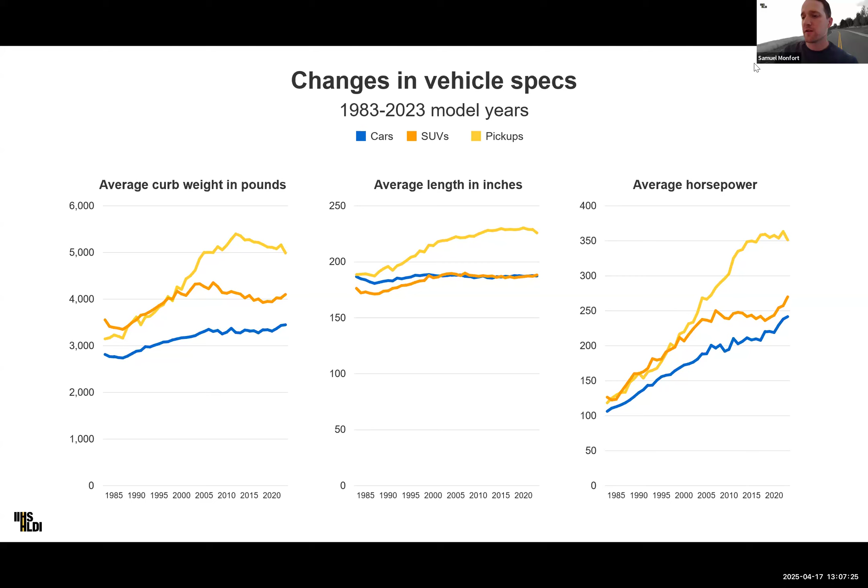But another factor is that not only are SUVs becoming more prominent, pretty much all vehicles are getting heavier, bigger, and more powerful. These three charts represent the average curb weight in pounds of vehicles in the US fleet, average length in inches of those vehicles, and the average horsepower that they have. As you can see, it's increases across the board. This is especially true among pickups, and another factor featured in a lot of media recently is the very large flat fronts of certain pickup models, which is definitely something we've observed quantitatively as well.

There's been a lot of good work studying this, and generally speaking, what they found - just to set up what I'm going to share with you now - is that taller vehicles inflict more damage to the people they strike. This is not terribly surprising, but what they find is that the hip height of the pedestrian relative to the vehicle front end is a key predictor of certain crash kinematics. A crash kinematic is essentially what happens to the person after they're struck - where do they go. It also predicts injury outcomes. We find that these taller vehicles in general tend to imperil people.

Unfortunately, a lot of the research has been done on either older samples of US vehicles or on sets of vehicles from other countries. For example, in Europe, American style pickup trucks are not very common, and vehicles in general tend to be smaller. So our approach here was essentially to repeat some of these findings, expand on this research, and really focus on the current fleet composition of the US today. Because again, our main goal is to understand how the growing US vehicle fleet influences pedestrian injury patterns.

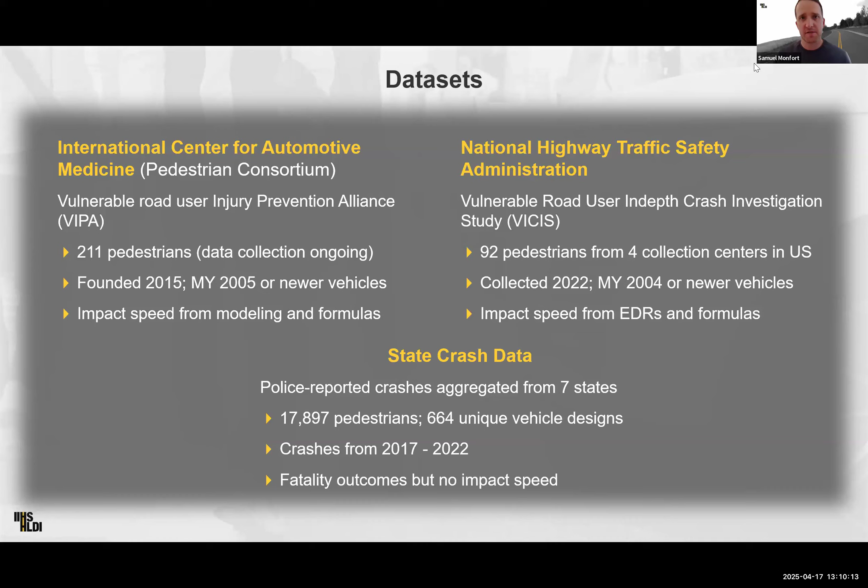The downside of having very detailed crash data is that you can't collect very much of it - as you can see, that's just about 300 crashes. But oftentimes you want to make conclusions using larger data sets, and that's where some of these state crash records come in. So I'm going to be sharing with you next the results of a study we did using this kind of data.

It involved nearly 18,000 pedestrians from police-reported crashes around the United States. These crashes, like I hinted at before, contained less information, so we just focused on fatal or not.

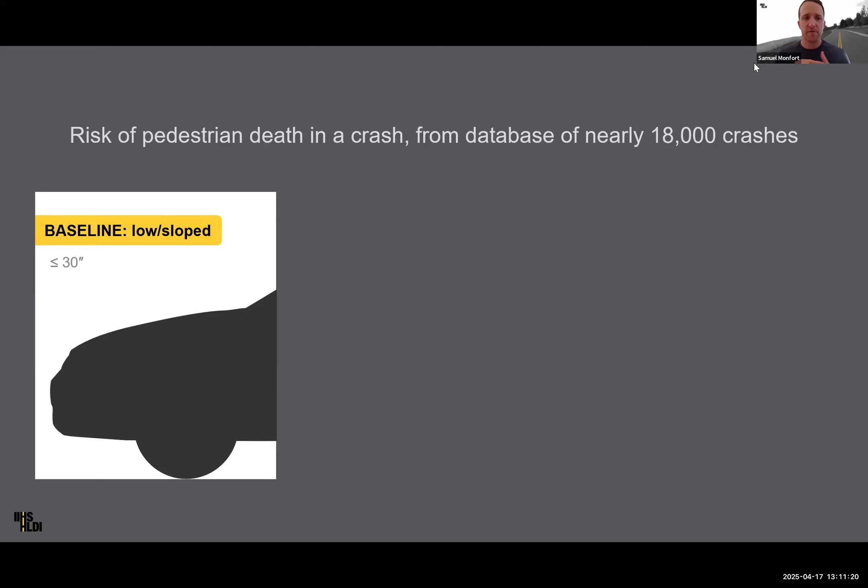Using the state crash data, we wanted to see if certain vehicle front-end shapes are linked with more severe crash outcomes. If we consider a baseline typical passenger car, what does it look like when you compare taller and differently shaped vehicles to it? The facet we settled on was essentially sloped versus blunt. A blunt front end is pretty much flat from the bumper up to the hood leading edge, whereas a sloped design has more curve to it. I'll show you a silhouette to demonstrate shortly.

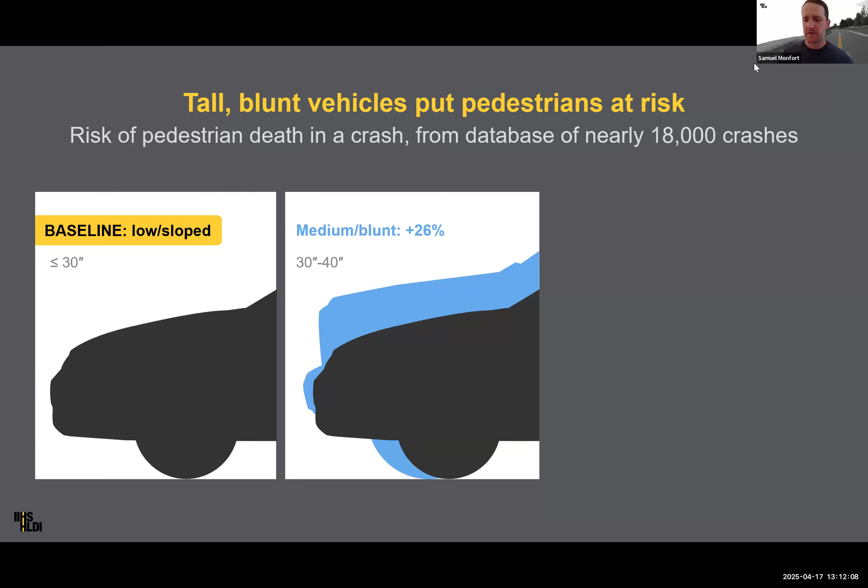Front end shape did matter though. In fact, as you decrease the height a little bit, it was the medium and blunt front ends that elevated crash risk. In other words, if the vehicle is tall, it doesn't matter what shape the front end is. But if the vehicle is intermediate, somewhere between low and high, that's when the front end can start to make a difference. When you compare low-and-sloped against low-and-blunt and medium-and-sloped, you get a similar crash risk all the way down.

This is important because every single pickup in our sample had a so-called problematic front end, either tall or medium and blunt. More than half of SUVs did too. So this seems to be an issue that's mostly evident among SUVs and pickups. Experientially, you can probably testify those tend to be the larger vehicles, but they also tend to be the ones with flatter front ends. On the other hand, none of the cars in our sample qualified as tall, and only a subset qualified as medium and blunt. So again, SUVs and pickups especially tended to be the vehicles responsible for these undesirable crash outcomes.

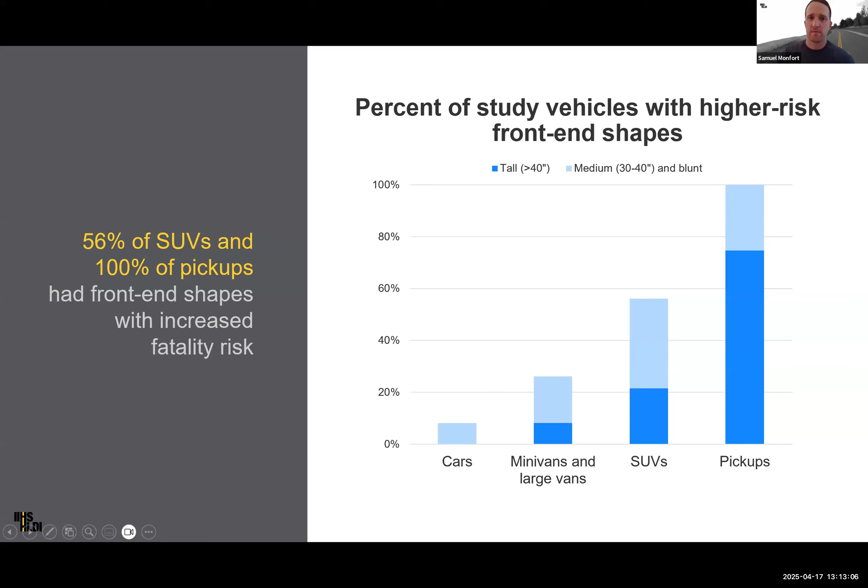What we found is that tall vehicles across the board were associated with greater head injury risk. Regardless of vehicle shape, you had more severe, on average, head injuries for these tall vehicle crashes. On the other hand, tall and blunt vehicles specifically tended to injure the torso and hip more often and more severely - think mid-body injuries. But those head injuries tend to be worse across the board, which may help explain why we saw similar fatality risk for tall vehicles overall.

So what happens after a pedestrian is struck? We're finding that pedestrians struck by tall and blunt vehicles tend to be especially likely to be thrown forward after impact. What does that mean? When you're struck by a vehicle, there are many different outcomes - you can be thrown forward, roll back and then be thrown forward, or roll back and go over the vehicle. So there are many different kinematic outcomes.

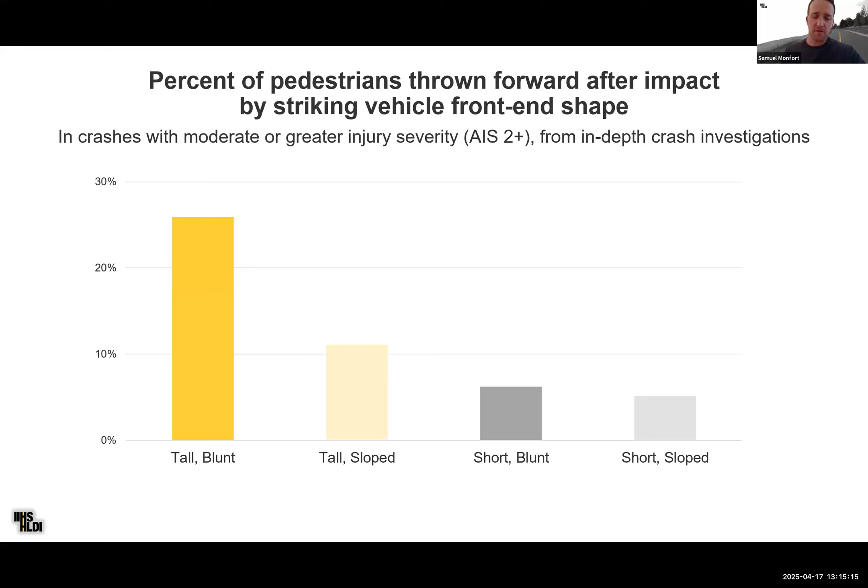What we found is that these tall and blunt vehicles tend to concentrate their crash force all at once, hit you, and throw you forward. This is bad because of that concentration of crash energy - there's less time for the vehicle to impart that kinetic energy onto you, but it's also bad because it puts you onto the road, where you're at greater risk of being subsequently run over. Again, that seems to be unique to these tall and blunt vehicles.

And it's not just crash injuries and kinematic outcomes that are different. It also seems to be affecting the injury risk associated with crash speed as well. One of the most powerful predictors of crash injury outcomes is the impact speed at which you were struck, and what we're finding is consistent with that.

But it's more complicated. The chance that a pedestrian is injured after being struck by a motor vehicle at a certain speed depends on the shape of that vehicle. At very low speeds and at very high speeds, you see similar outcomes between cars, pickup trucks, and larger vehicles in general. But at those mid speeds, you see quite a large divergence.

What we found, for example, is that at 30 miles an hour, the median height car has about half the serious injury risk associated with it than the median height pickup does. And this is concerning again because of the rise of these vehicle types on the road today.

I'm going to hand it off now to Becky, who's going to present other work that we've done on vehicle front end height. All right, thank you.

So for this analysis, we once again looked at that in-depth data where we really have detailed information about the crash, the injuries, all of that. But we're going to flip it on its head. So instead of looking at vehicles by category in terms of height, we're actually going to be looking at the pedestrians, because pedestrians can vary greatly in height. So we want to look at the pedestrian hip and waist height relative to the front end height of that vehicle.

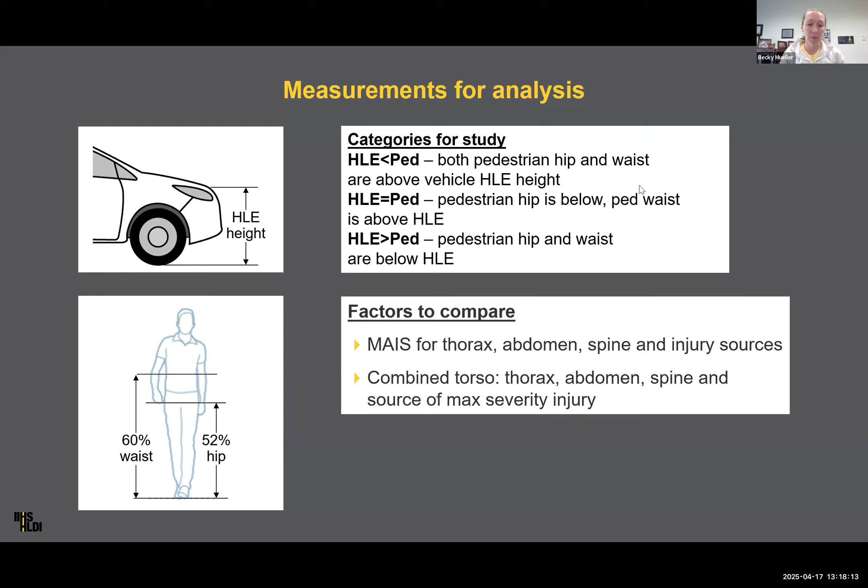We looked at the torso overall, and then we also looked at the individual body regions that comprise that torso area: the thorax, the abdomen, and the spine.

We found that between the ones where the person is much taller than the car height, and the ones where the vehicle height is much taller than the person's hip and torso, we found a significant difference. As the vehicle gets taller relative to the pedestrian, the probability of getting an AIS2 plus injury to any one of those body regions increases. And it's especially true between those very short vehicles and the very tall vehicles.

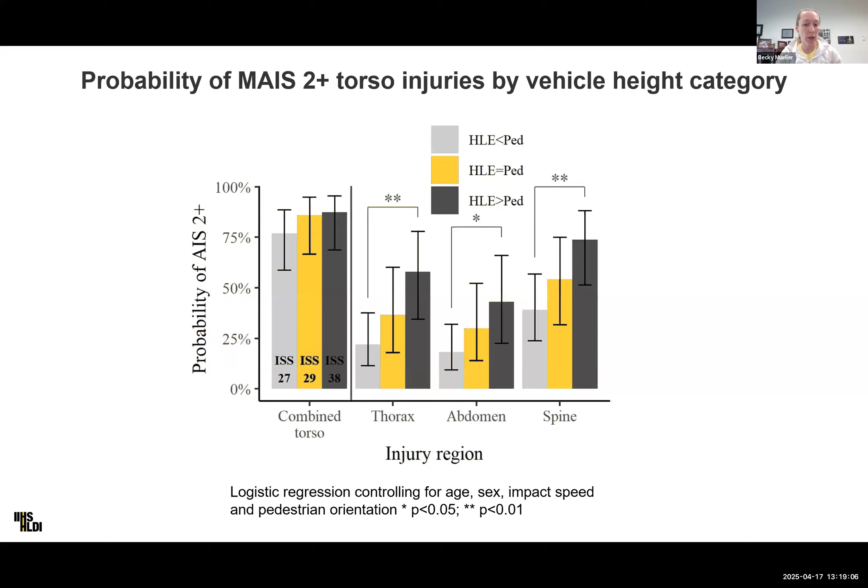The thing that we really wanted to drill down to is where are these injuries coming from. The big difference between those shorter vehicles and the taller vehicles is really the prevalence of injuries coming from that front end of the vehicle.

So these very tall pickup-like, large SUV-like vehicles, we're seeing a large proportion, a little over 30%, of the torso injuries coming from components like the headlight, the grille, and those front fascia components, versus a lot more of those injuries coming from the hood and the cowl area for the shorter vehicles, either medium height or very short. And what does this mean in terms of how we can influence vehicle design is the real question.

We'll talk a little bit about that. What we're seeing is there's different kinematics associated with this as well. So when the pedestrian hip is much higher than the hood leading edge, the pedestrian's more likely to roll up the vehicle and also translate up the front of the vehicle, where we might see heads hitting windshields and A-pillars and those kinds of things, as well as a somewhat indirect hit to the torso.

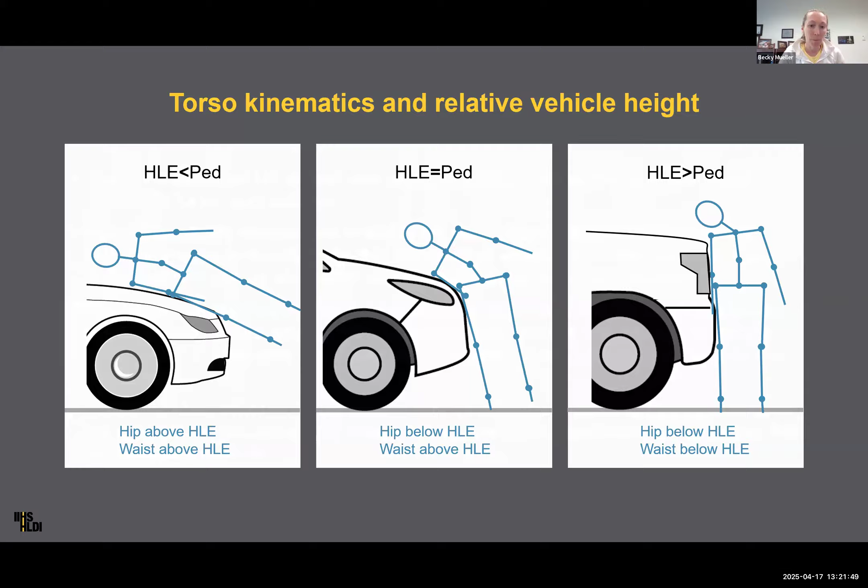We are really trying to understand what kind of tests either we or NHTSA or other organizations can apply to these vehicles to address those very different kinematics we're seeing, very different injury patterns and injury sources, and focus on whether there's something that can be done from an impactor test standpoint. We know that organizations like Euro NCAP have head impacts and leg impacts, but this torso region is something that has not yet been addressed.

There are folks working on developing an impactor test for the thorax, but we want to make sure that this impactor test works not just for vehicles in Europe, but is also applicable to all the types of vehicles, especially those American-style pickups that we have here in the US that may be unique, and there may be limited data on understanding that.

What we do know is that the tallest of these vehicle categories, these large SUVs and pickups, are associated with the largest proportion of those AIS 2+ torso injuries, and often result from those front components, the headlights, the grille, the front fascia, compared to medium and short vehicles where injuries are coming from the hood and the greenhouse.

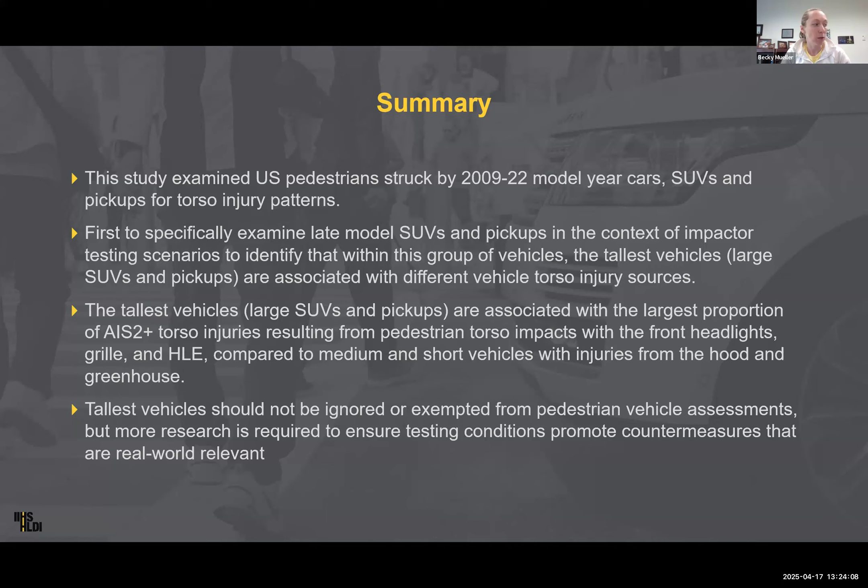So there's no one-size-fits-all method for assessing these vehicles. These may be very different methods of assessing a small, short vehicle versus a tall and blunt vehicle for these kinds of injuries.

We've got an ongoing research project with the University of Michigan, UMTRI, to look at the effect of these different front end shapes and sizes and stiffnesses on the prevalence of these torso injuries. We're looking primarily at these very tall, boxy front end vehicles, and we want to learn more about how vehicle design, mainly changing subtle aspects of the shape and size of those vehicles, can influence the prevalence of those torso injuries.

So we're working with them. They have experience using these kinds of human body models, finite element models. They've worked on developing a series of different front end shapes that represent the wide range of vehicles that exist here in the US.

They're going to be running a parametric study of about 300 different simulations, looking at a range of those impact speeds, in those speeds where, as Sam had mentioned, there's a big difference between whether the vehicle is short or tall, and the injury outcomes.

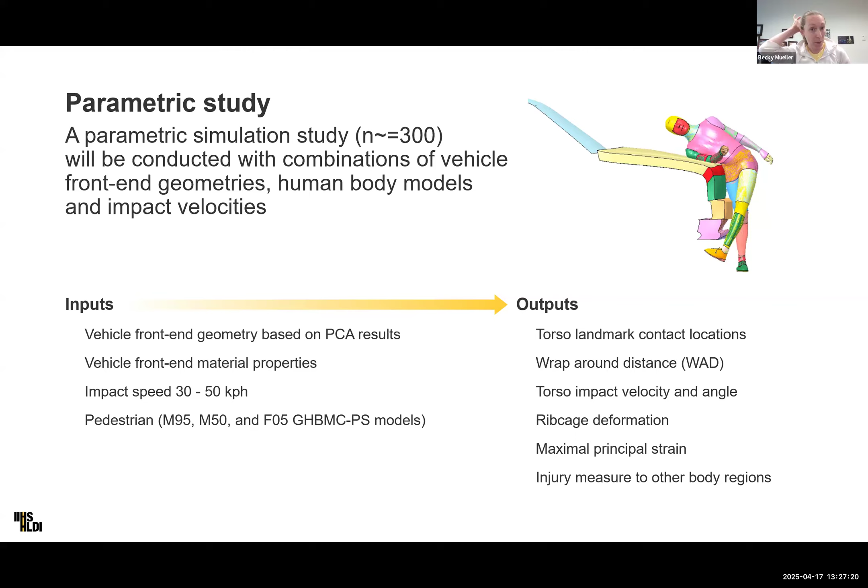So that is basically the summary of what we're planning to do here. We want to understand those torso injury sources for a category of vehicles, across vehicle categories, and what are the potential types of effective tall vehicle countermeasures for the torso.

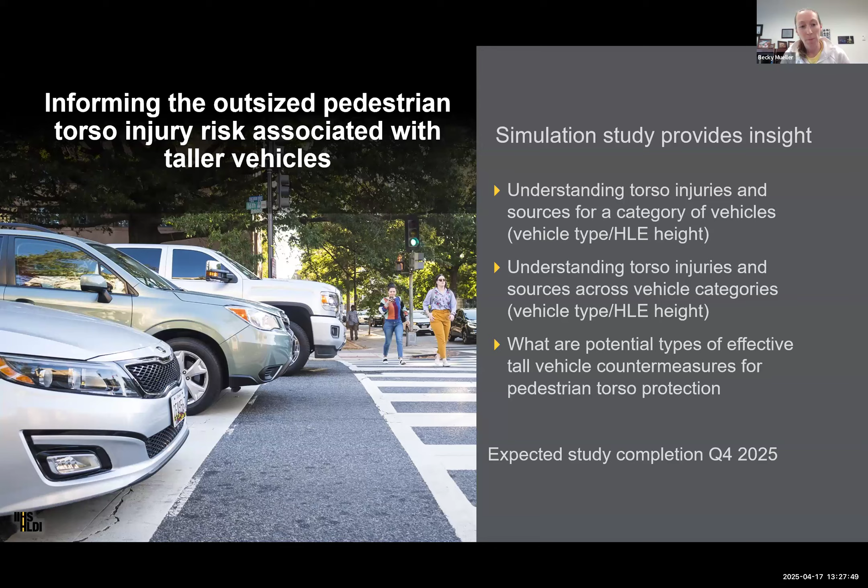Something else we're looking at, a different aspect of pedestrian safety, is blind zones, from the driver's perspective. How many of these pedestrian crashes occur because a pedestrian is caught in a driver's blind zone? We've developed a method for measuring driver direct vision so we can compare different vehicle models, and we've got two different driver eye perspectives: a 50th percentile male sitting in our mid-track average position, and a small female sitting further up in the vehicle. How do different drivers see for a given vehicle, and how does a given driver see across a variety of vehicles? This is very new research we're doing.

We're also hoping later this year to have a study comparing real-world crashes to the blind zones in those vehicle models, to see if larger blind zones correlate with a greater chance of hitting pedestrians. So stay tuned for those results, as well as studies where we look at a wide range of vehicles and compare across the US fleet, from a mini car all the way up to a large pickup, to see what blind zones are occurring and what we might do to reduce that—whether changing vehicle structures, or promoting technology that alerts the driver to a pedestrian in a blind zone.

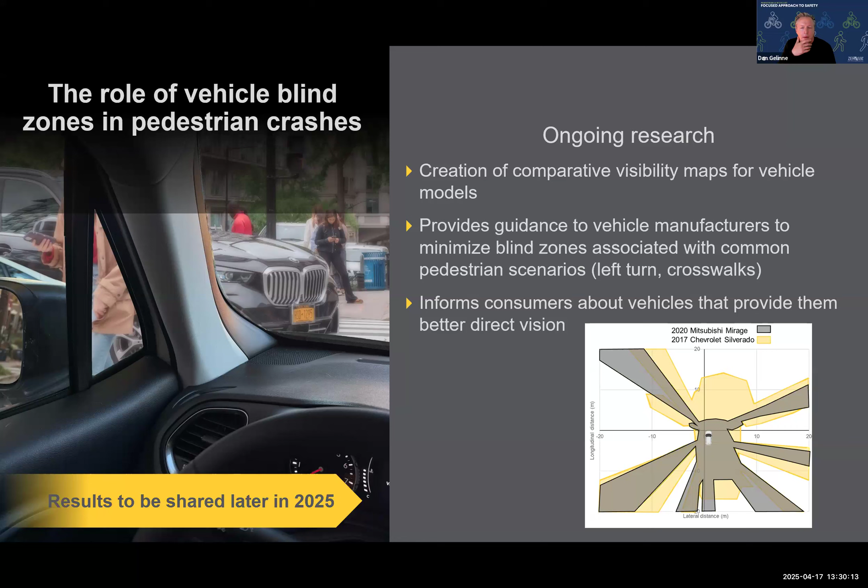Before we move along, there was a clarifying question about the acronym HLE used throughout the presentation—could you redefine what that is? That is the hood leading edge, the height of the front portion where it transitions from the hood going up to the hood going back. Excellent, thank you so much, I appreciate it. We'll get into more questions a little bit later, but thank you for that presentation.

Thanks for having me today to talk a bit about the work AAA has done, and my team has managed, regarding pedestrian detection systems. If you're not familiar with AAA, we're the world's largest motor club. We've been advocating for safe automotive systems since 1902, formed as an advocacy organization back when we were arguing for equal rights of the newfangled automobile alongside horse and buggy, and we're still doing that today. I run a team of engineers on both coasts focused on advanced vehicle technologies—everything from advanced driver assistance systems, in this context, all the way to different fuels and electrification, and everything in between.

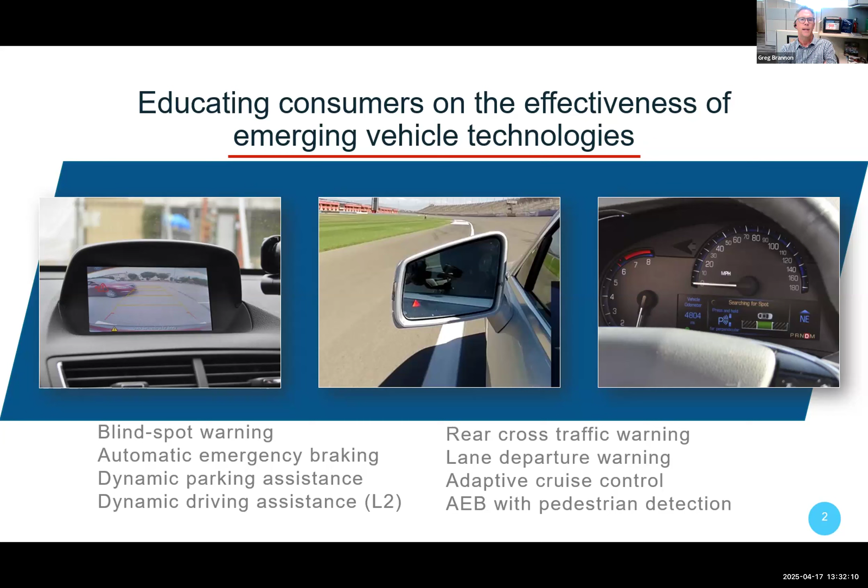Since 2013 we've been analyzing different advanced driver assistance systems, and related to the presentation Becky and Sam just provided, pedestrian detection systems are something we really felt it was important to look at. This study is a few years old now and we're in the process of refreshing it. But it would be great, regardless of hood height or vehicle design, if the vehicle didn't hit the pedestrian to begin with. That's really the point of a pedestrian detection system, or pedestrian AEB—automatic emergency braking—for this scenario. We wanted to look not only at the basic functioning of these systems, but also the more challenging situations where a pedestrian was most likely to be struck or killed.

Some of those scenarios outside of broad daylight in an intersection include things like a child pedestrian coming out from between parked cars, a pedestrian right after a curve, as well as two pedestrians just along the roadway walking alongside the road.

But most importantly, we also wanted to look at the performance of pedestrian automatic emergency braking at night. The data shows that approximately 75% of pedestrian deaths happen at night, and I think you'll see from the results that if you were designing a system to do the most good, you might end up in a different place than we're currently at.

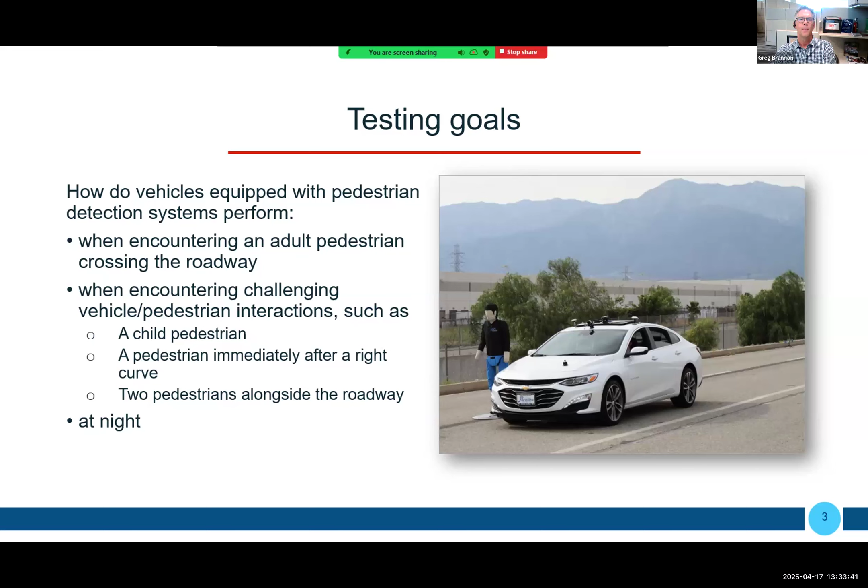First, we'll look at the most basic scenario, one that is pretty similar to what the European standards at the time had in place, and now also looking at some of the things that the proposed FMVSS 127 standard offers.

This is the daytime scenario where the pedestrian crosses in front of the vehicle, and the vehicle, if no braking is applied, would strike the pedestrian at the center of the vehicle.

We tested at a couple of different speeds because we felt like the lower speeds, while interesting, didn't offer the situations where most pedestrians were injured. So we tested at 20 miles an hour and at 30 miles an hour.

At 20 miles an hour, we had 100% of the vehicles we tested have a notification that there was a pedestrian in the roadway. Unfortunately, they only avoided a collision with that pedestrian some 40% of the time.

And at 30 miles an hour, the effectiveness of the systems really went south, with only one test vehicle avoiding the collision at all, and in that case, only 2 out of 5 runs.

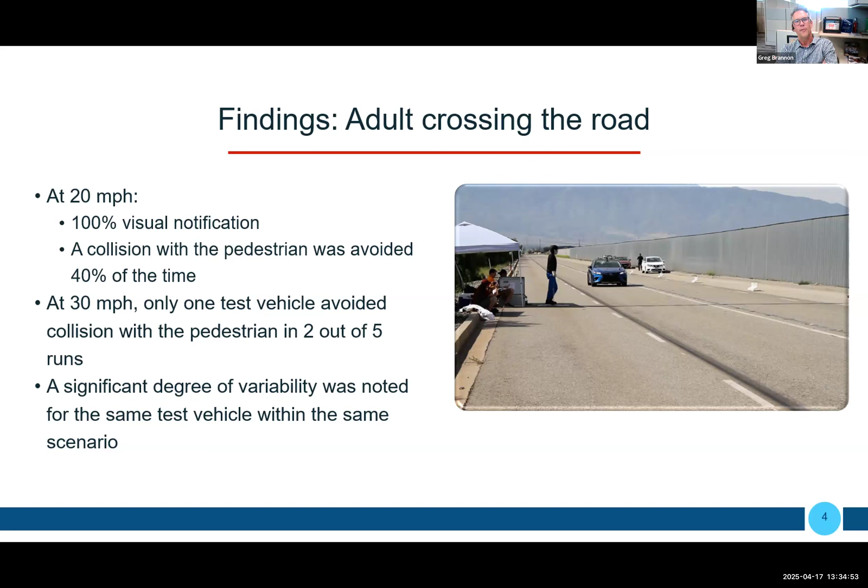So as you'll see in the video here, I'll go ahead and roll. There's a significant amount of variability in the way these systems work.

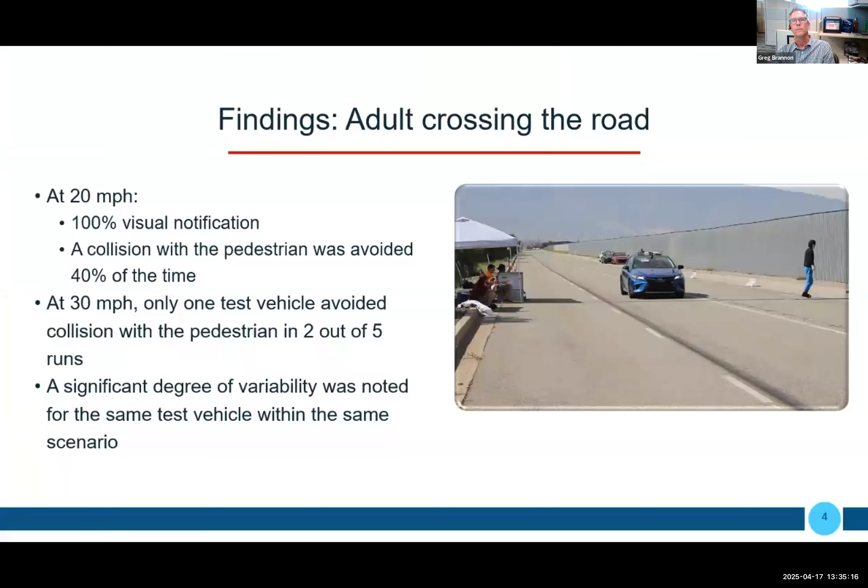Right, so we'll move on to the next scenario here. That is the one with the child darting out into traffic, and we say darting because it's moving at a little quicker pace than the adult pedestrian in the scenario we just saw.

We looked at this at both 20 and 30 miles an hour, and unfortunately, in the case of the child pedestrian, a collision occurred almost 90% of the time. At 30 miles an hour, none of the test vehicles avoided the collision with the child.

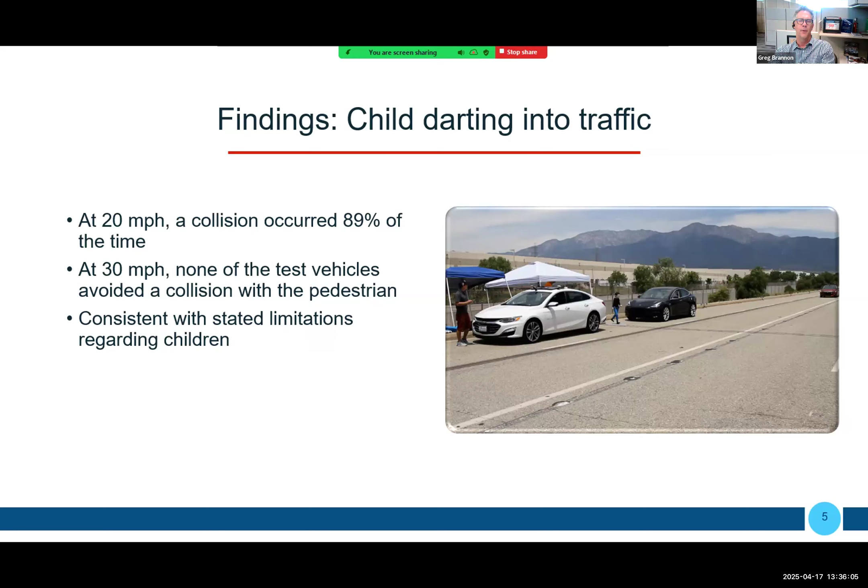As noted, we weren't terribly surprised by these findings, as most of the owner's manuals show these types of limitations. Unfortunately, the owner's manuals don't always track with the advertisement for the vehicle. So let's look at the scenario.

Unfortunately, stopping after the pedestrian is struck is, in this case, not terribly helpful.

Moving on to the next scenario we looked at here. Again, 20 and 30 miles an hour, and this is basically two adults walking down the road, with one adult slightly in the path of the vehicle.

We tested at both 20 and 30 again, and we found that unfortunately, a collision occurred 80% of the time at 20 miles per hour, and at 30, only one vehicle avoided the collision on one run.

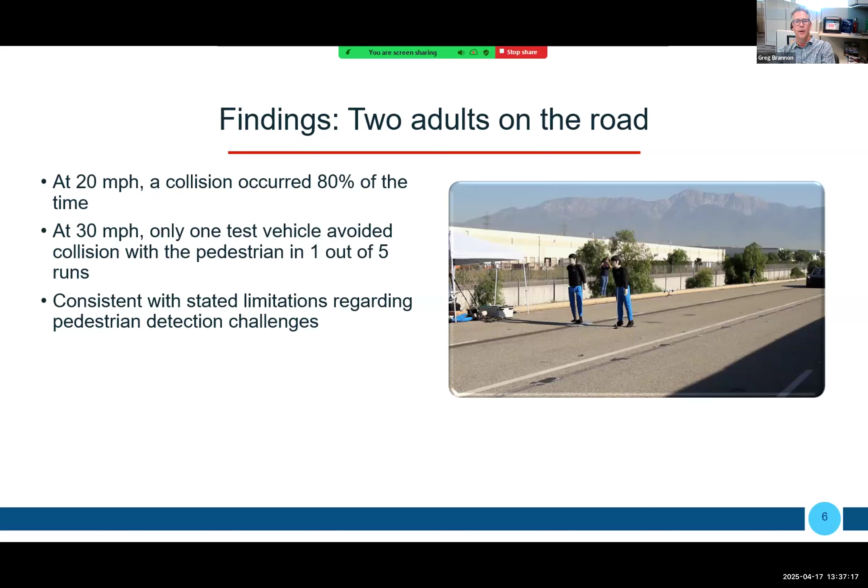Again, consistent with the expectations of the system, but this is a very basic scenario where a pedestrian is simply walking down the road. So let's watch the video here.

All right, so getting into some very interesting findings. In the essence of time, I've left out the research that we did around a curve. The short version is they were completely ineffective around a curve.

I think you'll see with the nighttime effectiveness of the system that there is a tremendous amount of work to do, whenever you consider that 3/4 of pedestrian deaths happen at night, and the systems were all completely ineffective. So we'll watch some of the videos here on that.

So that, unfortunately, is not a good result.

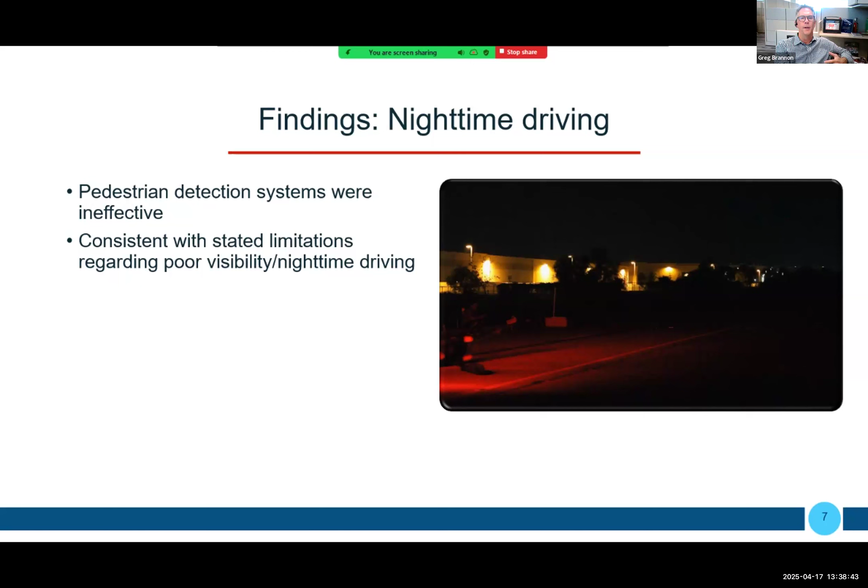As I mentioned earlier, we're going to be revisiting the nighttime portion of this testing in a couple of weeks, and we're very anxious to see if the vehicles have gotten better over the past few years at detecting pedestrians at night. We're also going to look at the implications of a roadside worker wearing the clothing they should be wearing along the roadside, and see if the systems work in that scenario.

So our recommendations here are fairly straightforward, focused on drivers and regulators: for drivers, you need to drive these things like they are not there.

And if you're in the situation where pedestrian detection and automatic emergency braking may help, that's great, but you definitely should not rely on it, and discourage yourself from engaging in things like looking at your phone, because 100% we cannot rely on these systems to avoid a collision with a pedestrian.

For the auto manufacturers and the regulators, our message was that if you're going to focus on one thing, make these systems work at night when pedestrians are actually dying. The good news is the regulators heard that. The bad news is the automakers are sort of fighting that new regulation at the current time. So TBD on what the outcome of all that's going to be, but we're hopeful that the persistence on the message that if we want to do the most good, these systems definitely need to work at night.

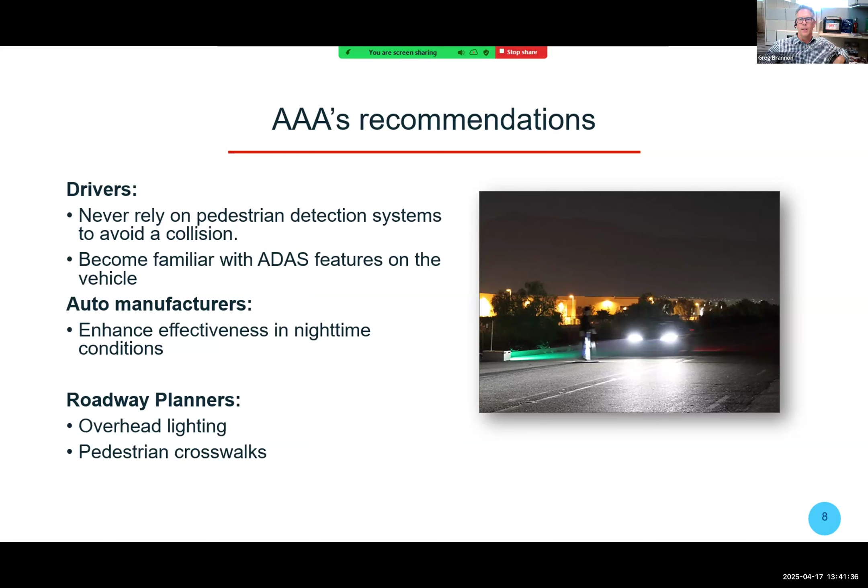One of the challenges is that the current technology for pedestrian automatic emergency braking relies heavily on cameras, and cameras can't work without contrast. That's an unfortunate aspect because it takes light to create contrast on the target, or the vulnerable road user in this case. So it's extremely critical that we consider both the infrastructure as well as the regulation and the design of the vehicles themselves. With that, I will stop and turn it back to Dan.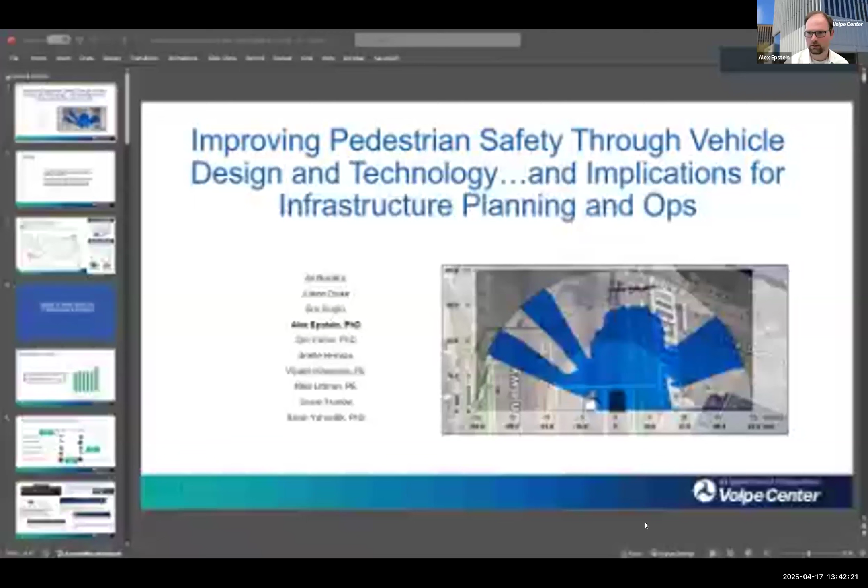So let's see, thank you very much for the opportunity. I think this is a really good flow of presentations with Sam and Becky talking about the vehicle design, and Greg speaking to the ADAS systems capability and limitations. I'm going to speak a bit more about some aspects of both vehicle design and technology and their implications for infrastructure planning and operations. So taking a bit of a step back in this presentation, I do want to acknowledge this is the work of many people at the US DOT Volpe Center where I work, as well as many of our colleagues across the department. It's also collaboration with Becky and others at the IIHS and with other organizations such as MassDOT. So just taking a quick step there.

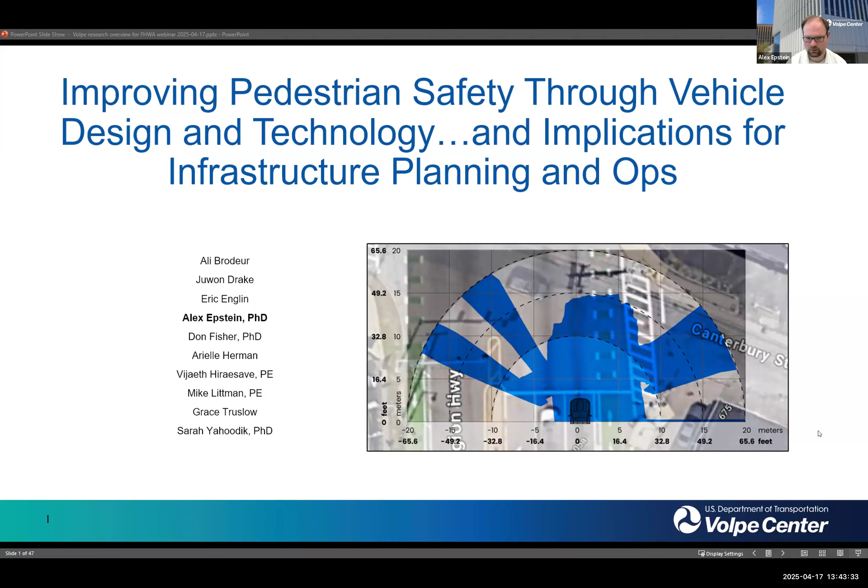Notice this is not official information that I'm giving you on behalf of the US government. These are recommendations, or observations, that are based on the best technical judgment of Volpe Center staff and not to be misconstrued as policy or guidance of the department. Having said that, I also want to thank the City of New York, City of Boston, and again, the many partners we've worked with on this work.

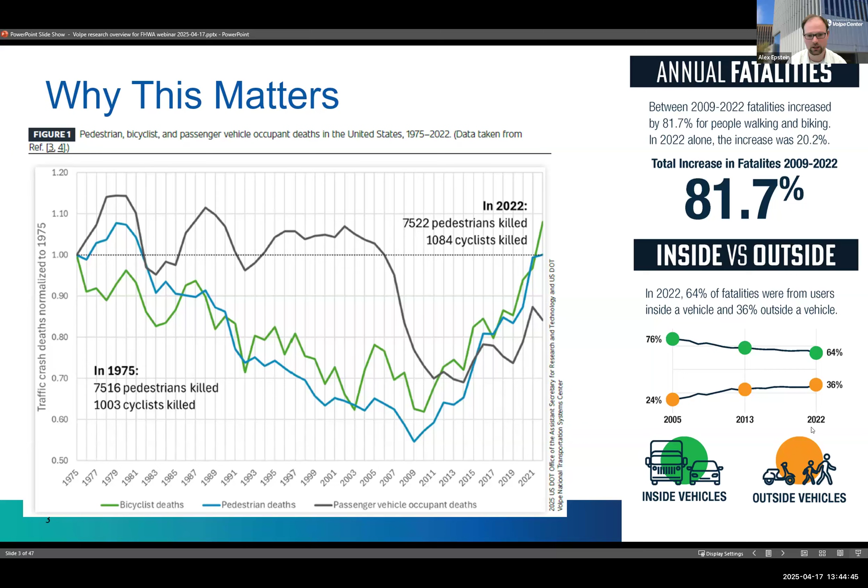I was pleased to see, thank you Sam and Becky, for showing this earlier on. This is a slightly different way of stating the same problem, which is if we look at the national data set on fatal crashes since 1975, the beginning of record keeping, we were making a lot of progress on reducing pedestrian and cyclist deaths in this country. And when you normalize it, unfortunately, we've lost about 40 years of progress in the last 10 years. We're back to where we were in 1975 when it comes to pedestrian and cyclist deaths, if not more. Meanwhile, motorist occupant deaths have generally gone down, although still not as much as we would like.

With that, we ask ourselves, what can be done? What are the safety issues and countermeasures to reduce some of that trend? One observation is the increasing prevalence of speeding-related deaths. Speeding is now implicated in about 30% of traffic deaths and rising over the last several years, and doesn't seem to be reducing.

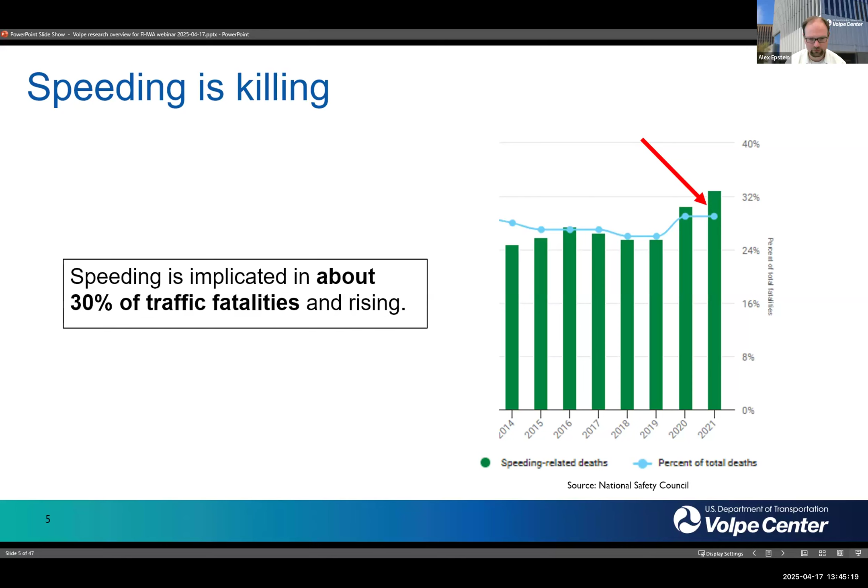One area we identified, and we have longstanding collaborations with some of our overseas counterparts, is what is the full toolkit here? We have an established toolkit for speed management that across transportation engineering encompasses regulatory speed signage, speed feedback signs, automated enforcement, safety cameras, and changing the road design with either quick or capital infrastructure investments. And each of those has some limitations. They can be highly effective in some cases, but either the effectiveness is limited in terms of reducing speeds, or they may not be very fast to deploy.

For example, reducing speed limits, signs are quick to change, but they're not particularly effective. Now, there's some effectiveness, but to a point. And similar for road design, it can take a long time, decades, for capital projects to get planned and funded and executed.

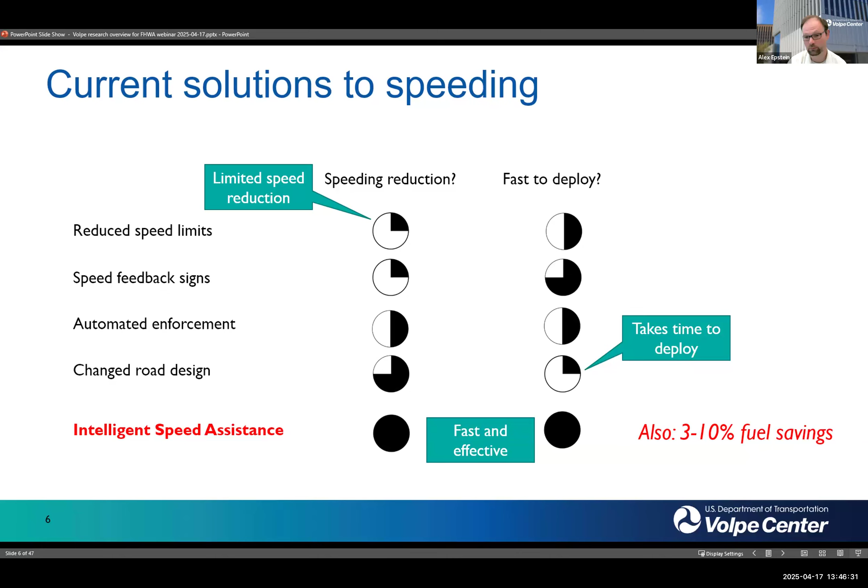Now, there's one other tool in the toolkit, and this is intelligent speed assistance, which until recently had not been widely considered or even had wide awareness in the United States. Something that also potentially can reduce fuel consumption and improve fuel economy. It could be fast and effective, and that's something we're seeing now with a wide range of both international and domestic within the U.S. programs and initiatives.

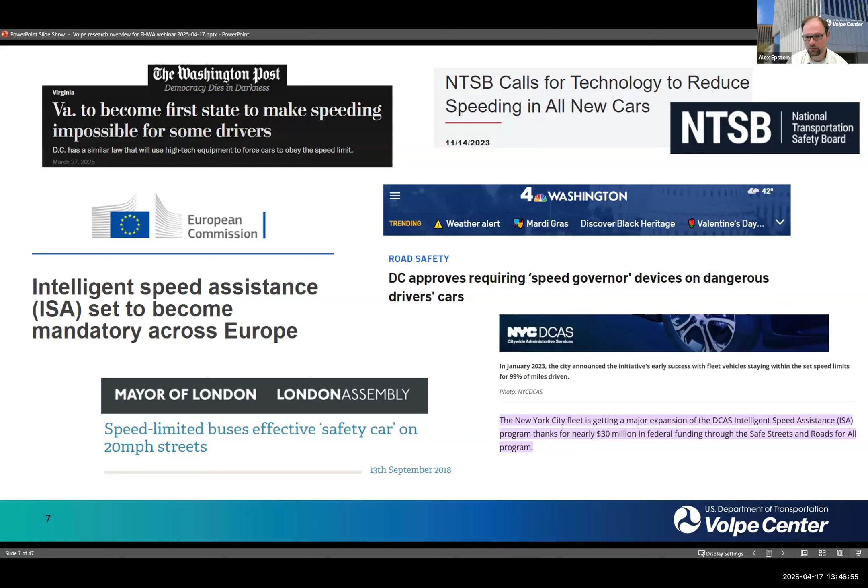Pilots. And so this is something we identified early on for the City of New York in our Safe Fleet Transition Plan collaboration with them in 2017. Years later, this led to an ambitious pilot that used the availability of aftermarket devices for intelligent speed assistance.

Just to be clear, what is intelligent speed assistance? It's a technical solution on board the vehicle to help the driver avoid inadvertent speeding. It can also be for habitual speeders, to prevent their intentional speeding. And really, it piggybacks on the telematics and other ADAS systems that we have on vehicles today, which is why it's broadly available.

And we actually have a current project right now where we're looking at private as well as public fleet adoption of the technology that tells the driver what speed they're supposed to be going and helps them adhere to that.

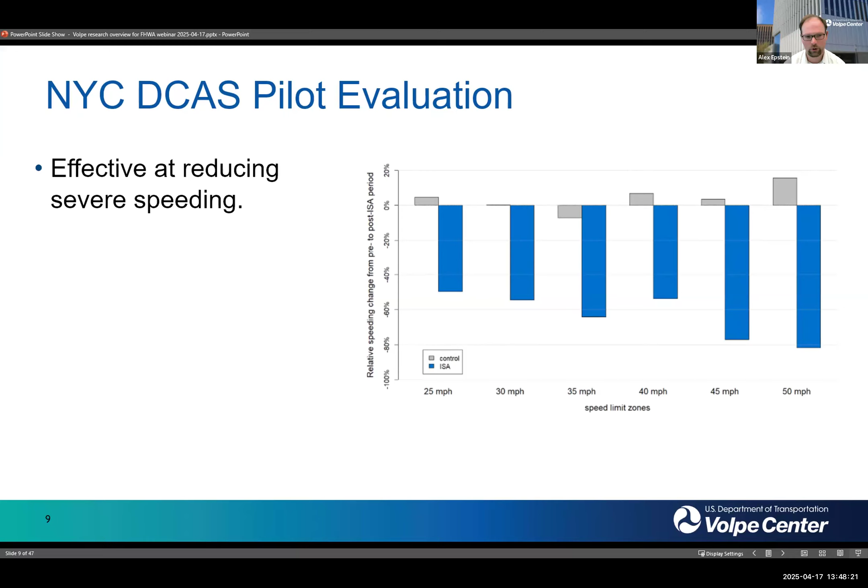Now, with this intervention, the question a few years ago was, is it effective? And we were lucky to be able to work with the City of New York on a large-scale evaluation. The City of New York has 30,000 vehicles, give or take. And initially, in 2022, they were able to get 50 vehicles outfitted with aftermarket devices, aftermarket intelligent speed assist. This later increased to 500 as we began to work on this effectiveness study.

What this allowed us to do over the period of about 2 years and 2.9 million miles driven was to analyze truly in a 2x2 fashion, control and treatment, before and after. What is the impact on driving behavior? And the impact on driving behavior actually surprised us to some degree with how effective it was.

Although because we'd already talked with Transport for London about their fleet, it was almost surprisingly identical to the effect that they observed when they installed aftermarket ISA on their fleet in England. So about 64%, about two-thirds decrease in driving over the enforced speed.

And another key point is this worked whether or not the driver tended to speed highly, or if they were habitual speeders who had accrued multiple violations over the years. They still decreased the amount of speeding time by about half in that case.

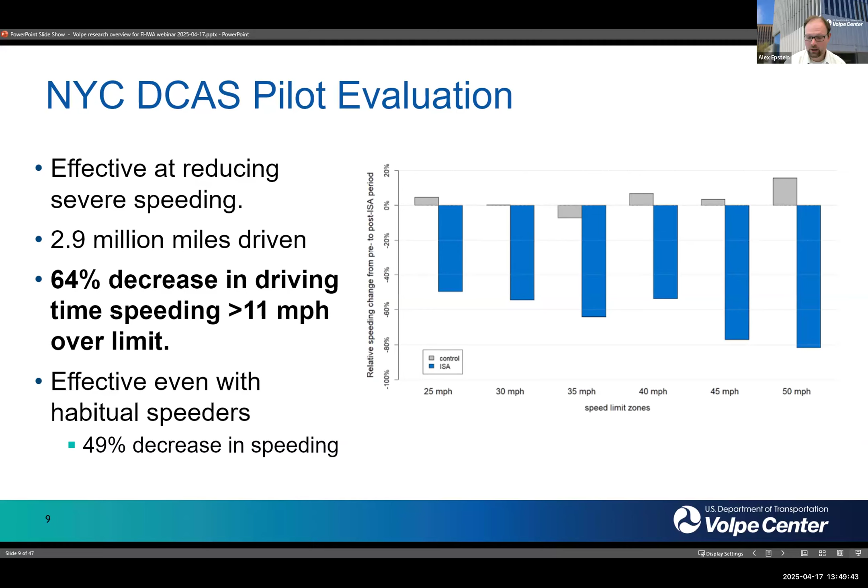Another interesting observation was we were able to bucket this both geographically and in terms of speed limits on the network. Within the City of New York, speed limits ranged from 25 to 50 miles an hour, and the greatest decreases were actually on the faster posted speed limit roads. So that's an active area of research for us at Volpe.

Another area of research, this was also alluded to earlier, is blind zones. It's difficult to avoid a crash when you don't see the person around you, and that's the fundamental challenge with vehicle design limitations on driver direct visibility.

These are two infographics that Federal Highway Administration created in the last year or two that highlight this issue, showing an SUV at left with a school zone, or a large truck with a family crossing in a crosswalk at right. In real life, how might this work?

This actual scenario I encountered near Volpe: a truck driver pulls up to the stop line that's 4 feet in front of the crosswalk, which is the Manual on Uniform Traffic Control Devices' minimum standard. They're doing everything correctly, but the vehicle design obscures their visibility of most of that family crossing in front of the driver.

Based on our analysis of available crash databases and some imputation, we believe it's over 700 fatalities a year, based on past data from UMTRI, based on not-in-traffic surveillance and other data. It's the hoods, the belt lines, the pillars, various geometric elements of the vehicle packaging that make it difficult for the driver to see.

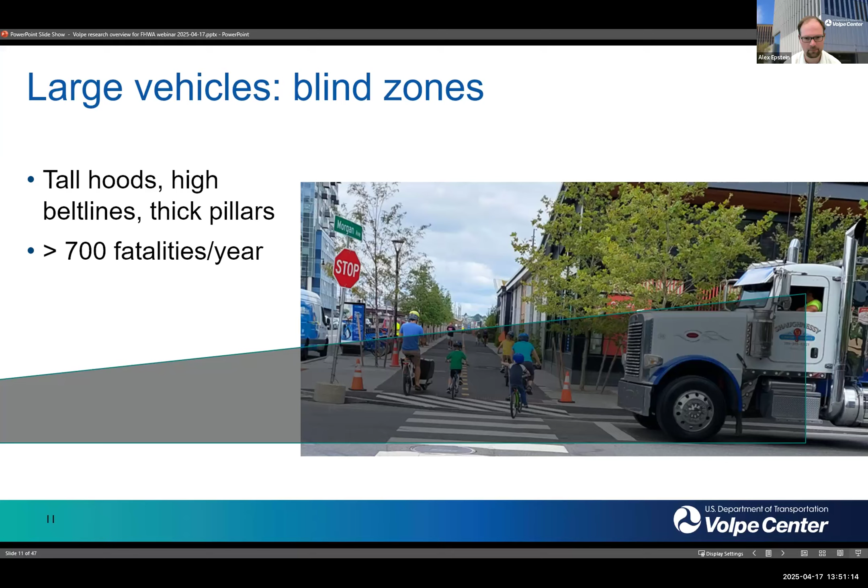To put a finer point on that, from the driver's perspective, here's what we're calling the direct vision area in green, the indirect vision areas in blue—that's mirrors and cameras. In other words, there's no line of sight, and everything else is the blind zone here in pink. For a large truck like pictured here, the blind zone can be a significant part of the area around.

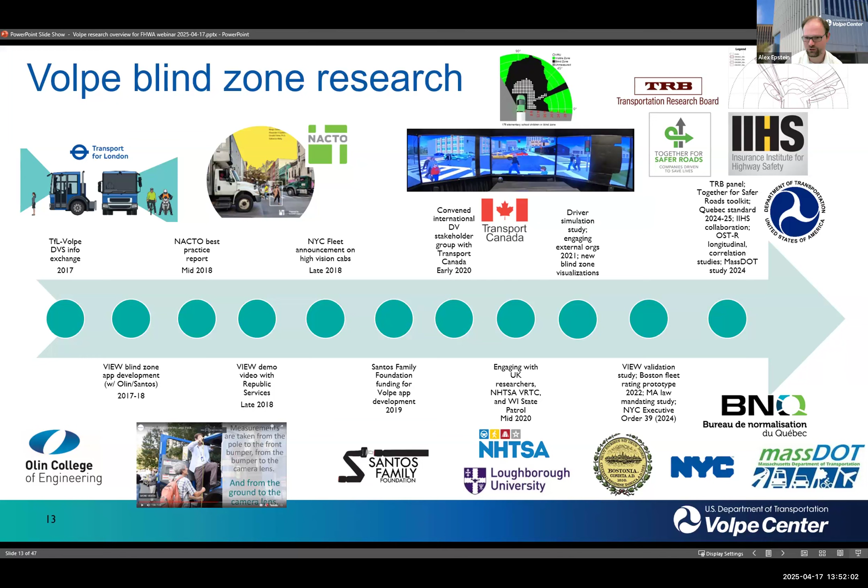This is something we've been studying, as I was saying earlier, going back to at least 2017. Not to belabor this, but this is a highly cross-disciplinary issue that affects pedestrian safety, vehicle design, infrastructure design, operations, and engineering, and so has certainly many stakeholders, and will continue to have many stakeholders in addressing and understanding this challenge.

One of those collaborations with those stakeholders allowed us to better understand the linkage. While it may be intuitive that if you can't see someone, you can't avoid crashing into them, the next question is, if you do see them at some point, can most drivers figure out that someone is still there and avoid crashing into them?

In the common scenario where the driver is at a light, like I showed you in that photo earlier, the truck driver stopped at a stop line and people are crossing in the crosswalk. That driver was in a low vision truck with a large hood in front. Instead, as an intervention, they could be driving a higher vision truck that has a larger windshield, a lower driving position, and better sight lines.

In that situation, we were able to get about 45 subjects. We were able to design an experiment in the simulated environment where no one's going to get hurt. It's very difficult to do this in the real world, but because we know simulated results are robustly correlated to real world results, we really can make strong conclusions.

We observed a crash rate of 87% in that top scenario where the little boy in the red sweater crosses and then maybe drops something or stops to tie his shoe. The outcome of the drivers either pulling forward on the green or stopping was extremely different—87% of the time they would run over the person in that case, even though they could see, and our eye tracking software showed that indeed the drivers were looking and tracked that someone crossed from the left but did not exit out from the right.

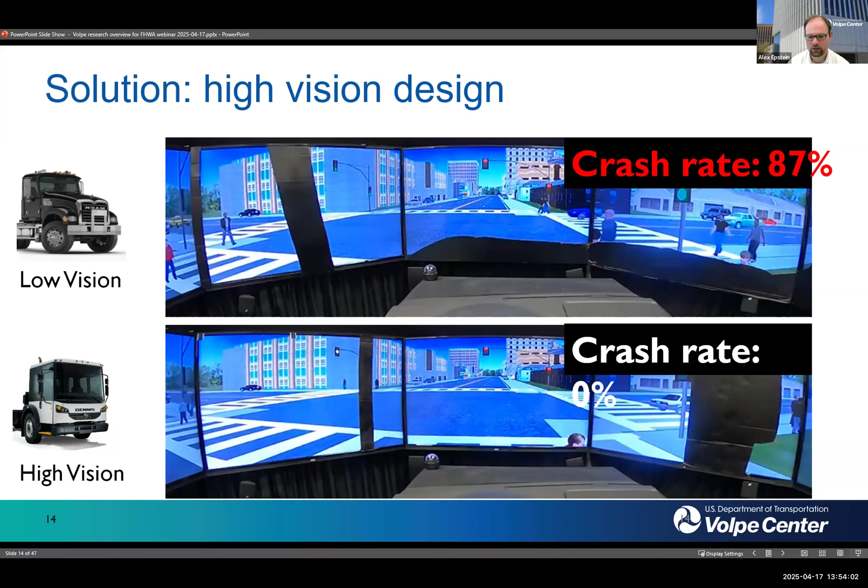This, in our view, was a major connection between the ability of a driver to see a pedestrian through line of sight and their likelihood of colliding and striking that pedestrian. Now, not every vehicle can be swapped out overnight, and the market for some of the high vision vehicles is still not where it would need to be able to do that.

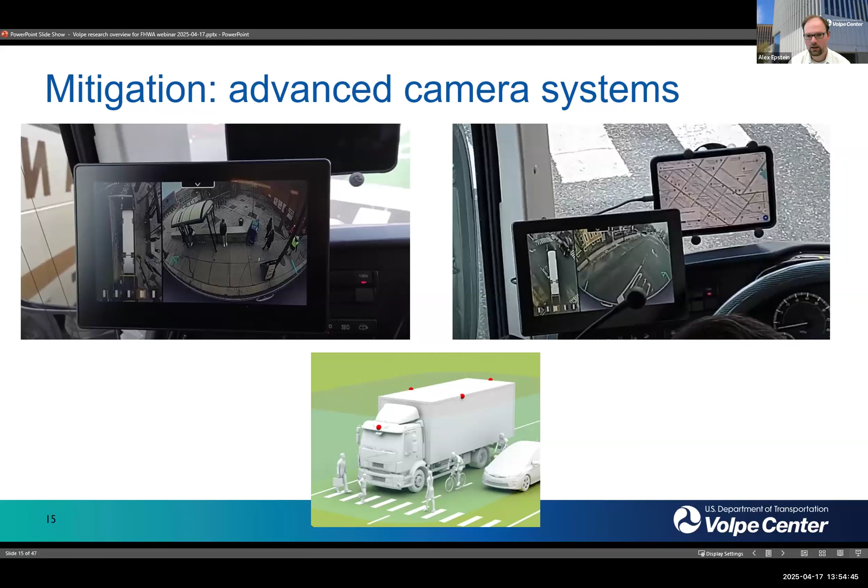So what are some near-term mitigations? One that we're looking into is advanced types of camera systems. These are some that we've documented in the bus and truck space, but they're also available on light-duty vehicles, typically from the OEM. We're in the process right now of using a VR simulation platform to examine how effectively they might help a driver prevent a collision with a person walking or biking in common scenarios.

Becky, Ms. Mueller mentioned earlier, and we are indebted to their team, and it's been a terrific partnership. We were able to actually just publish this paper that made early use of the blind zone measurement capability.

In addition to understanding how blind zone affects crash risk, we also wanted to ask how blind zones have changed over time. Sam showed us how the makeup of vehicles over time has changed. But even individual vehicles, if you look at a Honda CR-V from 1997 versus a Honda CR-V from 2022, they're not the same vehicle. This is the first time we believe it's been possible to track how vehicles have been increasing what you might call car bloat, as hoods have become taller, pillars have become thicker in some cases, and belt lines higher. For the first time, we've been able to quantify this using this tool.

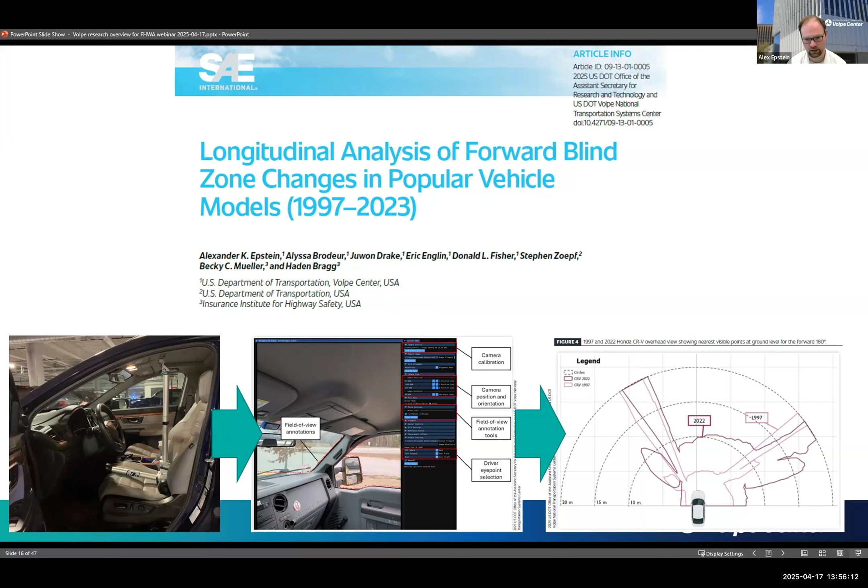You can take a look at this SAE paper that came out just a couple of weeks ago. These types of maps now make it possible to map out where a driver can and cannot see the pavement, where they can and cannot see a pedestrian, a child, an adult, and so forth. We've also done this in a low-tech way and mapped this out.

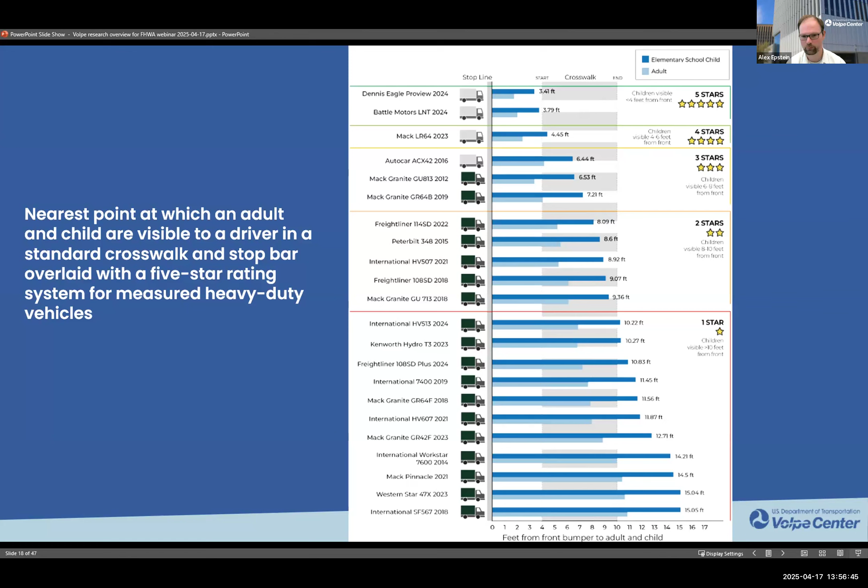This is where the infrastructure starts to come in. Once we know and can measure what adults and child pedestrians can't be seen by a driver, we start asking, well, where and when can they not be seen? In this case, this is a study with MassDOT where we use that same blind zone mapping approach, mapped against a crosswalk. This is that standard crosswalk you all saw the truck driver pull up to earlier in my presentation.

In a large number of these vehicles, the driver cannot see a child. Actually, about two-thirds of these makes and models can't see a child almost anywhere in the crosswalk. And in a smaller number, they can't even see an adult, right? About the bottom four trucks here, they can't see an adult anywhere at the crosswalk.

The same exercise we've mapped against a bike lane. So you can see here, again, these are large trucks, but we also did this with medium and light duty vehicles, over 60 vehicles in the MassDOT study, which is publicly available. You can pull it up.

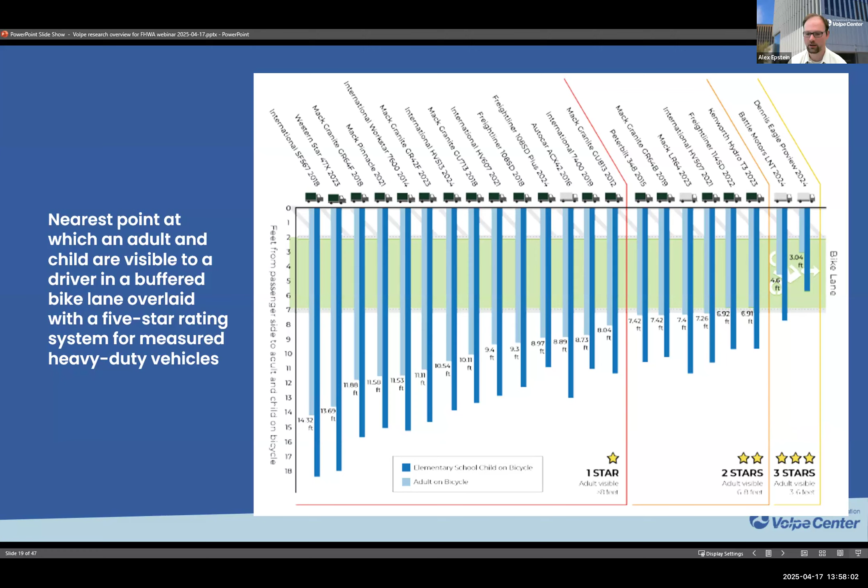Again, in some cases this is a more dire outcome, because when we look at an elementary school representative child on a bicycle, in a buffered bike lane with a 2-foot offset, almost any vehicle prevents the driver from seeing that child in the bike lane. Before a right turn, it's important to be able to see them without relying on mirrors, which have a longer response time, or sensors, which can have false positives and other pitfalls.

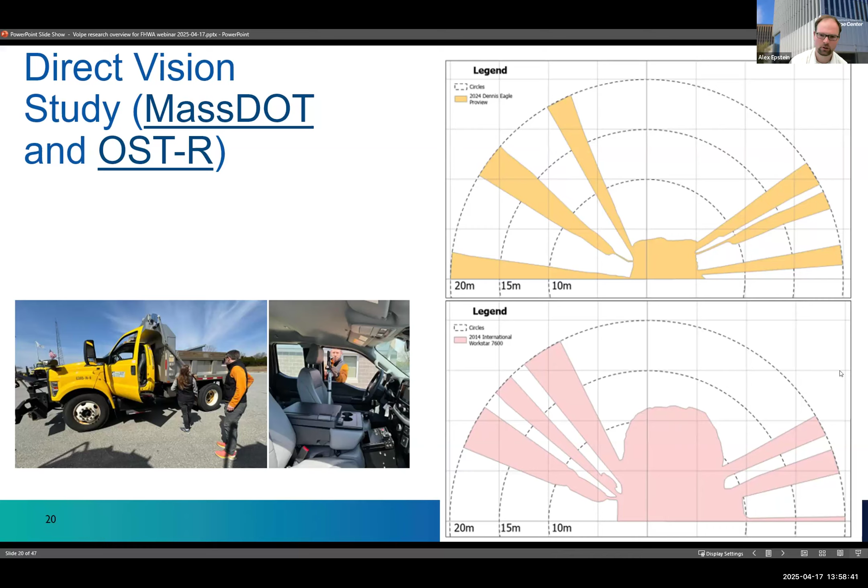So speaking of intersections, what does that mean? This is something we're working on right now. This is the next chapter in our work, bringing in the infrastructure. We see a lot of opportunities here, because while vehicles can be replaced and there's a fleet turnover cycle, there's also a turnover cycle for recapitalization, for repavement projects and quick build projects in cities, counties, states.

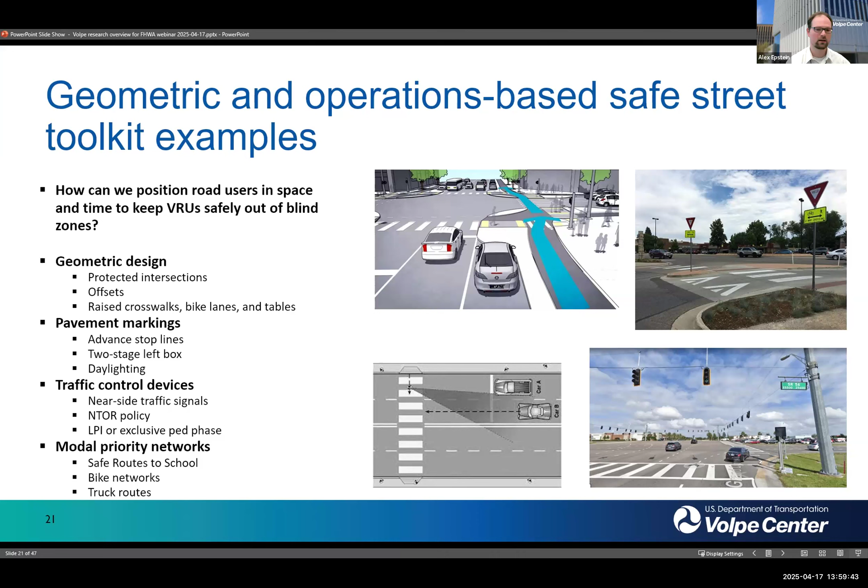There's a toolkit that we believe has the potential to help here, and potential to help on a shorter timeline in some cases. So there's some geometric considerations, like protected intersections or raised crosswalks. Just imagine a raised crosswalk that makes a pedestrian 6 inches taller. What's the effect on their risk of not being seen in the blind zone, or having a setback, pulled-back stop bar that's perhaps enforced by near-side signal, and then introducing leading pedestrian intervals? What does that additional 3 to 7 second lead time allow in terms of the blind zone envelope? These are some things we're actively looking into.

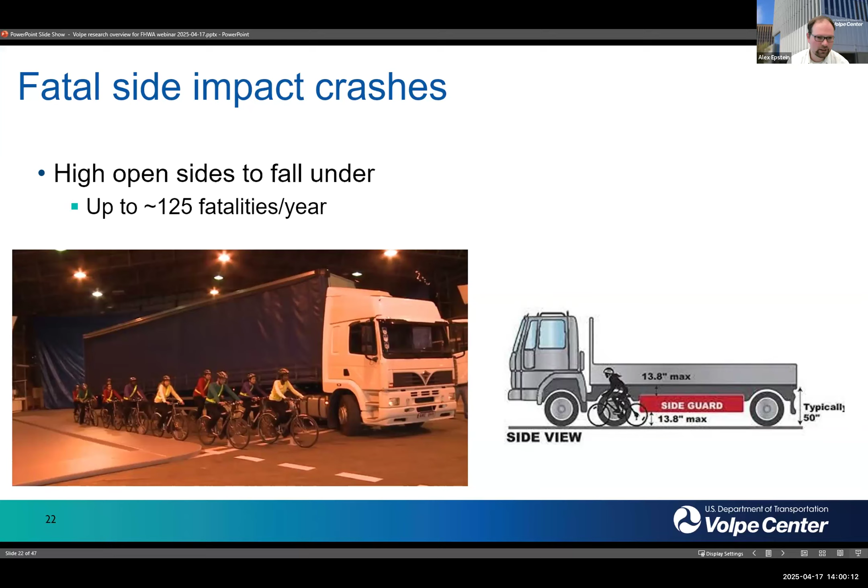Just to highlight another area we worked on, another vehicle design issue that can be turned into an opportunity, is side impact crashes involving large trucks. Speaking of blind zones, all of those bicyclists on the left cannot be seen by the driver in that truck when it's approaching the critical point of making that turn. One countermeasure there is a design change as well to the vehicle, but it's not the front of the vehicle, it's the side of the large truck that has an exposed underside.

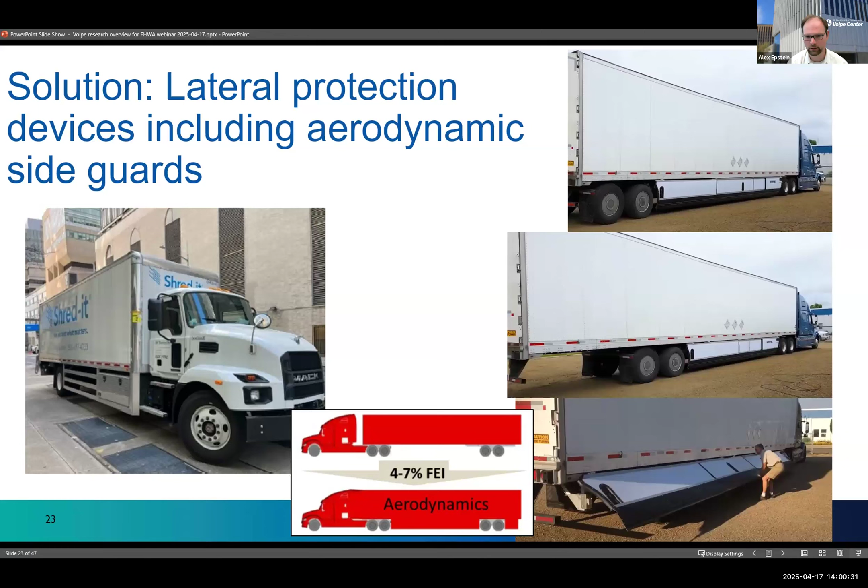Really, it's been a grassroots, bottom-up intervention with some of the early policies going back over 10 years. Volpe's role there has been to help avoid a patchwork of different specifications by coming up with a model specification that's been used for consistency. That has greatly helped, over the last 10 years, this specific intervention taking off and making inroads across fleets in the country.

There's another area of vehicle design, and this is almost taking a step back. Visibility, front end geometry, and the ability to fall under a vehicle and be crushed by the back wheels are all in some ways factors of the size of the vehicle. And if vehicles are larger than they need to be for a specific role, thinking especially in a fleet environment, then right sizing or downsizing those vehicles presents an opportunity for improved safety.

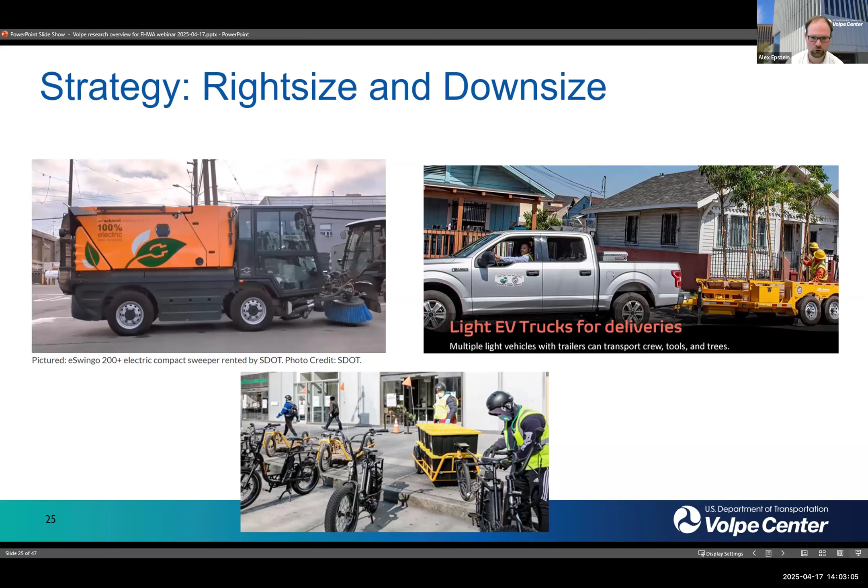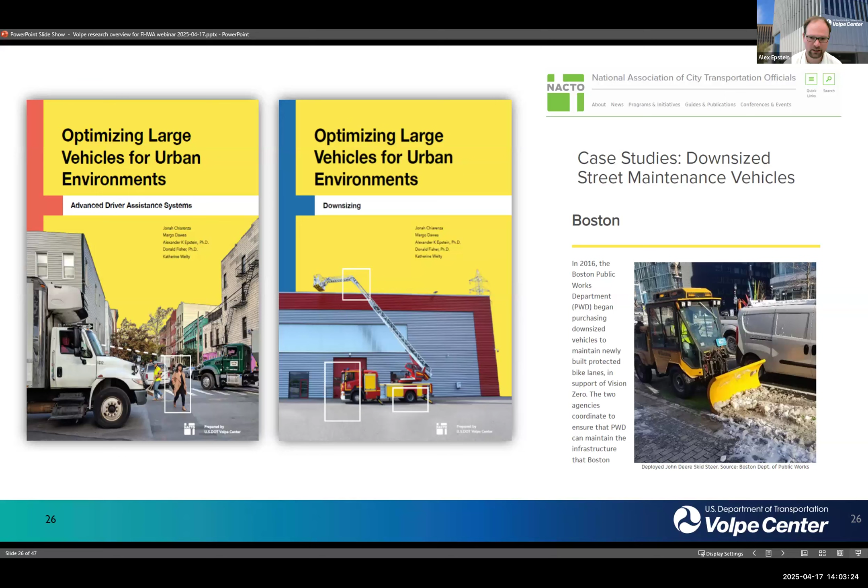So this is something we've partnered with the likes of NACTO, the National Association of City Transportation Officials, and quite a few cities over the years, providing case studies. There's an example of a snowplow that makes it possible to implement protected bike lanes, which then have their positive feedback loop of reducing crashes and injuries from crashes by reducing conflicts with motor vehicles.

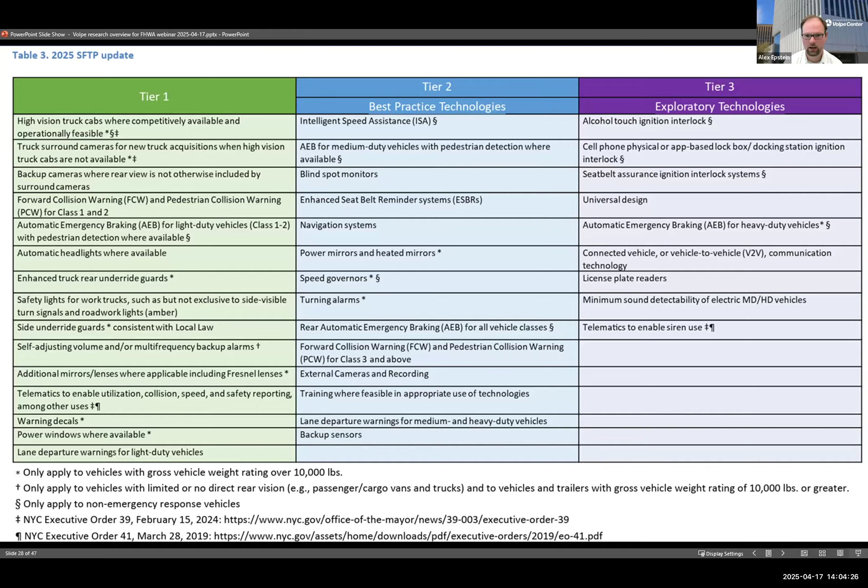This is something that has been more and more widely implemented, and just with the specific example of New York City, since 2017 when we started down that road, has resulted in over 100,000 discrete safety investments across their vehicle fleet, which is I think a significant milestone. So, what's next?

We're going to be working on supporting more public and private fleets to lead by example. When fleets lead, that can trickle down and help the economics for private vehicle owners as well. We're witnessing more state and local action in some of these areas, really recognizing that safe vehicles are part of a safe transportation system, and that it's a viable countermeasure at all levels of government and private sector organizations. We're going to be really bringing in the infrastructure as well, evaluating that blind zone safety reduction using infrastructure countermeasures as well as vehicle countermeasures once we know what those vehicle blind zones are.

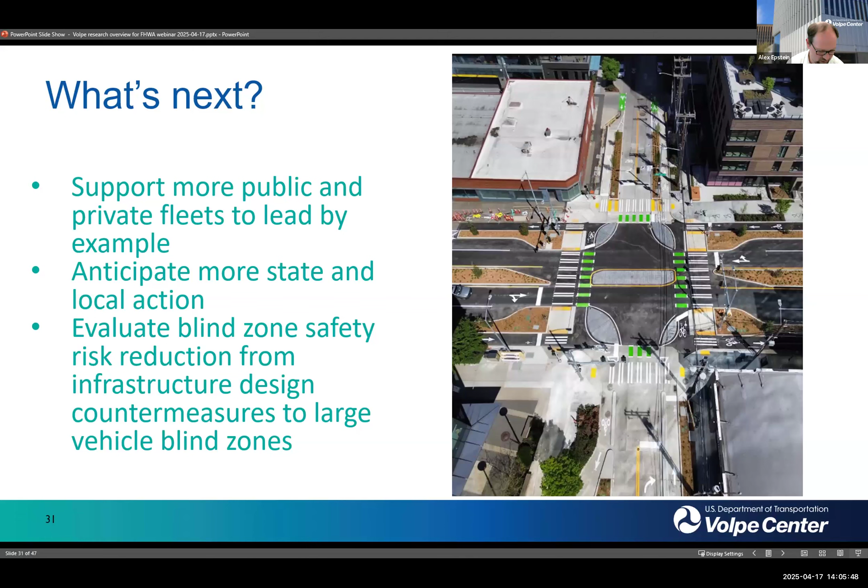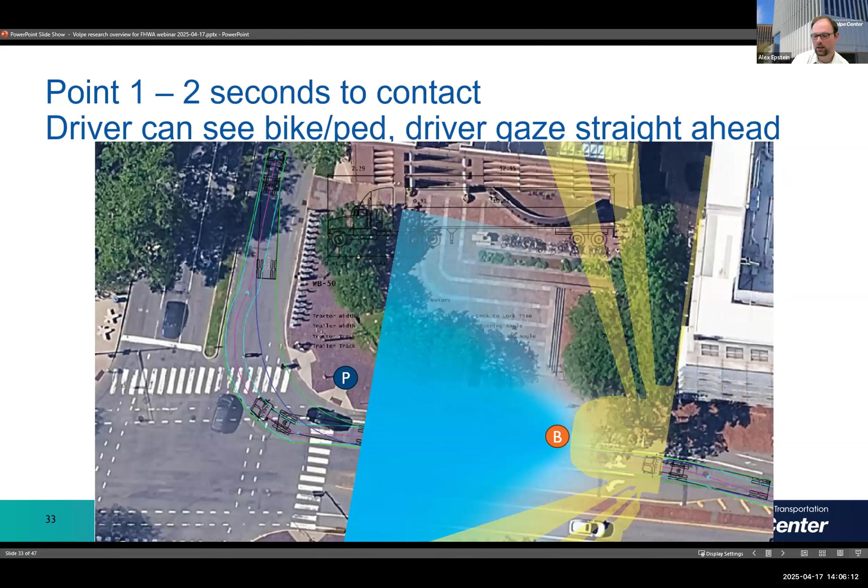I'm happy to share a little preview of some of our thinking, and would love to get some thoughts from the audience. But putting some of these pieces together, this is a work in progress. If anyone out there is also thinking about how to put together the blind zone envelope risk - in this case let's say for a bicyclist and a pedestrian - how do we map out and develop performance metrics, and then figure out the risk of being struck at the intersection or any of a number of other scenarios, how can we mitigate that using the right countermeasures in the right place? Come talk to me.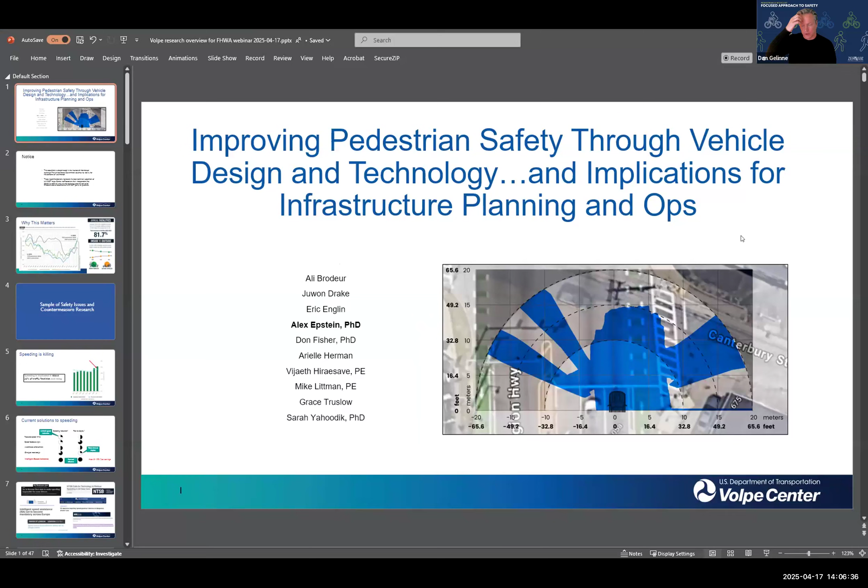I don't know exactly where to start, so I might start with this big picture question, and then we can get into some specifics. After hearing about all this promising technology and understanding the risks of certain designs and sizes that may increase the risk of injury, there are a lot of questions coming in about who can get this into vehicles. We know how to do it, it's just a matter of who's in the best position to push this forward. Should we be looking to manufacturers to take this on and build these into their vehicles? Is it the role of regulators where we need to be putting the attention? And what can local, regional, and state planners and engineers do?

Alex, you finished with a lot of that there about what can be done. But I wonder if maybe Sam and Becky, since we started your presentations with you, we can go around the room and think big picture about where the opportunities are for getting more of these technologies into vehicles and changing designs so that they're actually reflected in the fleet that we see on the road.

When it comes to vehicle designs or even including specific technologies, our standpoint has always been that regulation is the first place to go to set a minimum standard. So just like we do with crash testing, the regulations, the FMVSS, are here to make sure nothing falls below a certain level. I think that would be the first and most logical place to really drive change. But in situations like we may be in right now, where regulation, the government is not really pushing forward, it does potentially fall on folks like us to help provide consumers with information so that they can make safer, better vehicle decisions, and that will in turn get vehicle manufacturers to make those kinds of changes as well.